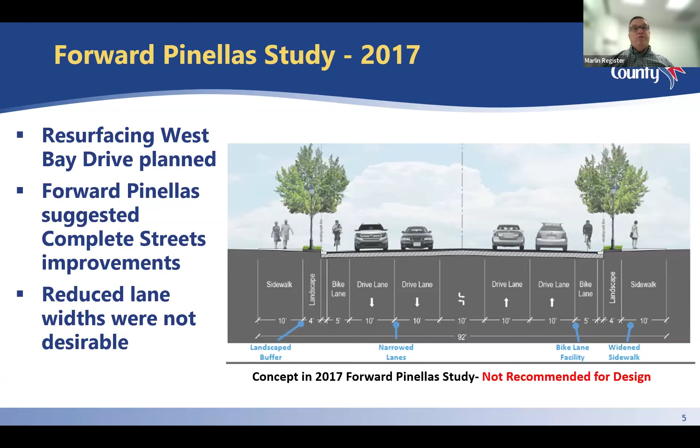In 2019, Pinellas County conducted a second study to evaluate other alternatives. Based on stakeholder outreach from city and agency partners, the county recommended a new concept that did not reduce the lane widths. The proposed concept included milling and resurfacing and restriping the pavement, adding landscape medians and pedestrian crosswalks, and constructing a 10-foot wide sidewalk on the south side of the roadway. This concept was advanced to the design phase.

Now let's look at the design for the proposed changes to West Bay Drive.

The goals of this project are to improve the roadway surface, increase driver, pedestrian, and bicycle safety, and improve pedestrian connectivity. These goals will be accomplished by resurfacing and restriping the roadway, constructing a new 10-foot sidewalk on the south side of the project area, and adding pedestrian crosswalks with flashing beacons at landscape medians. These improvements will better connect West Bay Drive neighborhoods, the Largo Medical Arts District, the Belleair Beach Causeway Bridge, beach communities, and the Pinellas Trail.

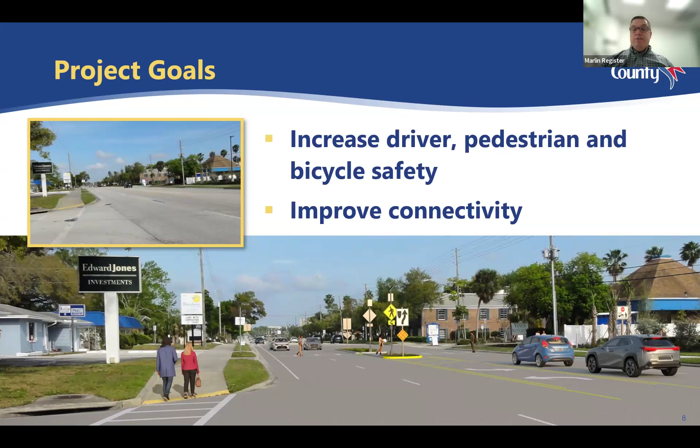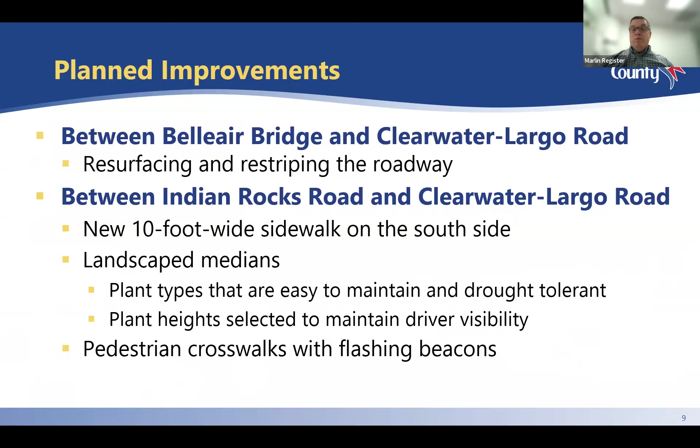Resurfacing and restriping is proposed within the entire project corridor between the Belleair Bridge and Clearwater Largo Road. From Indian Rocks Road to Clearwater Largo Road, a new 10-foot wide sidewalk will be constructed on the south side of the project area. 6 landscape medians will also be constructed, 2 of which will include pedestrian crosswalks with flashing beacons. Plants selected for landscape medians will be easy to maintain and will not interfere with driver visibility. Vehicle lane widths will remain unchanged throughout the project limits.

Planned improvements between the Belleair Bridge and Sunset Boulevard include milling and resurfacing only. This existing segment of West Bay Drive includes one 12-foot travel lane and 4-foot bike lane in each direction, separated by a center 2-way left turn lane with 5-foot sidewalks on both sides of the roadway. No changes are proposed.

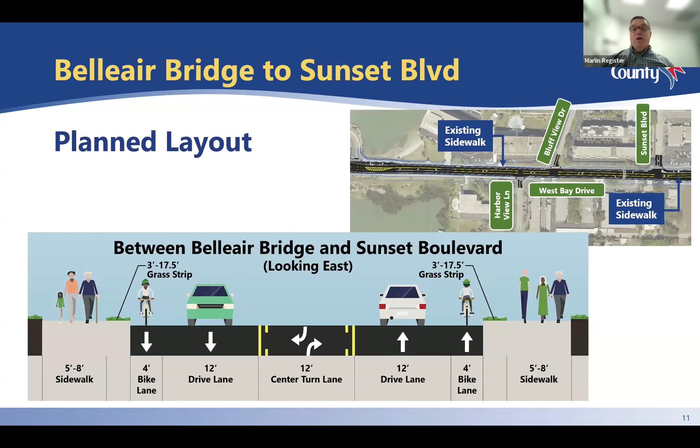Planned improvements between Sunset Boulevard and Indian Rocks Road include milling and resurfacing only. This existing segment of West Bay Drive includes 2 travel lanes in each direction, separated by a center 2-way left turn lane with 8-foot sidewalks on both sides of the roadway. No changes are proposed.

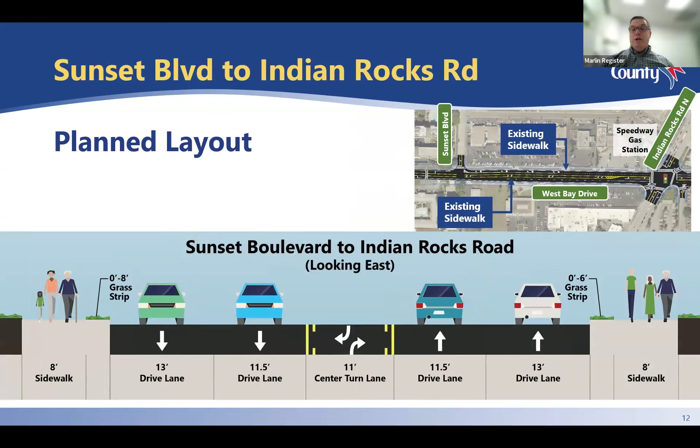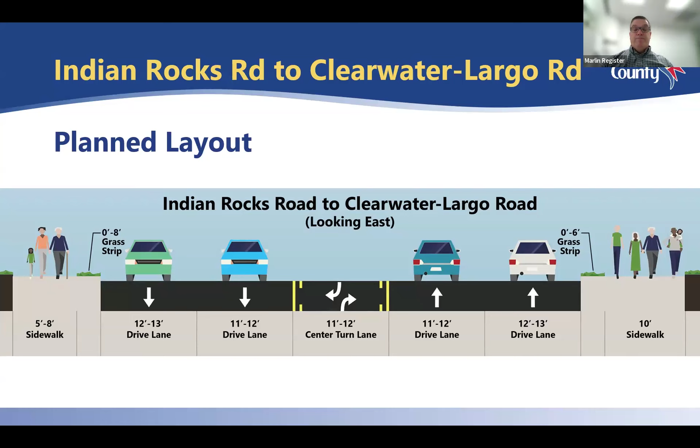Between Indian Rocks Road and Larchwood Boulevard, in addition to resurfacing and restriping, 3 landscape medians will be added. One of these medians, closest to Larchwood Boulevard, will include a pedestrian crosswalk. A new 10-foot wide sidewalk will be constructed on the south side of the roadway. Access to driveways in this section of the roadway will be maintained.

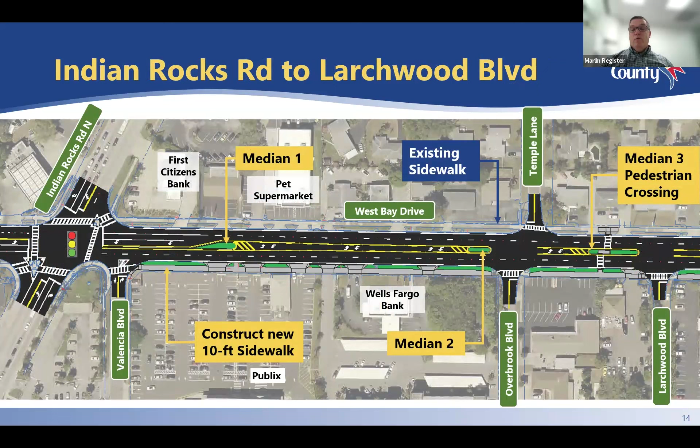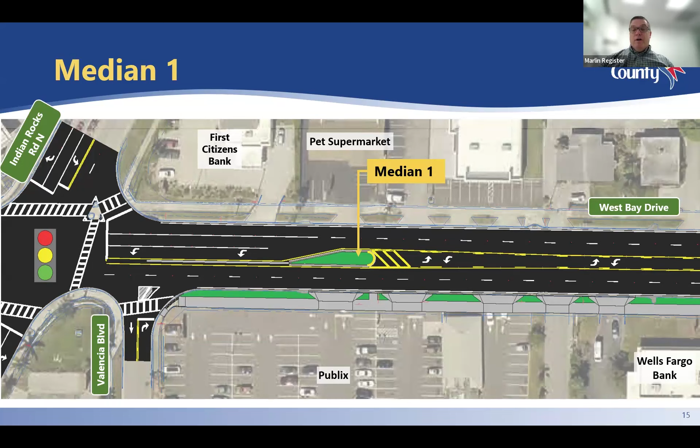Median 1 is a landscape median east of Indian Rocks Road and Valencia Boulevard that is part of a left turn lane from westbound West Bay Drive to southbound Indian Rocks Road. The median will extend across 2 driveways on the north side of West Bay Drive and the most western of 3 driveways to the Publix shopping center on the south side. Access from these driveways will not be impacted as left turns are currently prohibited. The traffic divider at the intersection will be shortened to allow left turn access to Valencia Boulevard.

Median 2 is a smaller landscape median just west of Overbrook Boulevard. No driveway or side street access will be impacted.

Median 3 is a landscape median with a pedestrian crossing between Temple Lane and Larchwood Boulevard. Left turns will be impacted for 2 driveways on the north and 1 driveway on the south at median 3. However, the left turn access for these movements will be accommodated from Temple Lane and Larchwood Boulevard. Left turns from the side streets will not be changed.

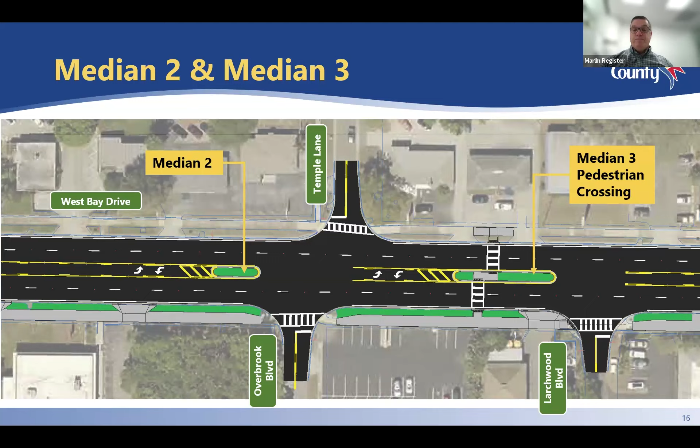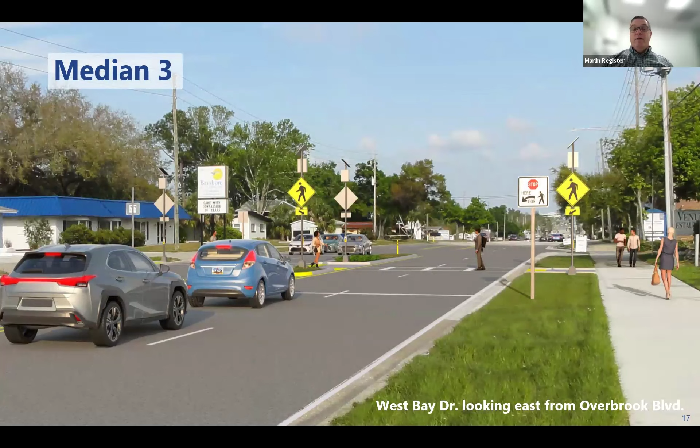Here is a rendering showing how median 3 will look after construction from West Bay Drive facing east. The pedestrian crosswalk and median are similar in design to the existing crossing on West Bay Drive near the Pinellas Trail. The crosswalk will include rectangular rapid flashing beacons that can be activated by pedestrians who want to cross West Bay Drive. The median will include landscaping and the crossing will be ADA accessible.

Between Larchwood Boulevard and East Overbrook Drive, one landscape median will be constructed between West Overbrook Street and Kilgore Drive. A new 10-foot wide sidewalk will be constructed on the south side of the roadway. Access to driveways in this section of the roadway will be maintained.

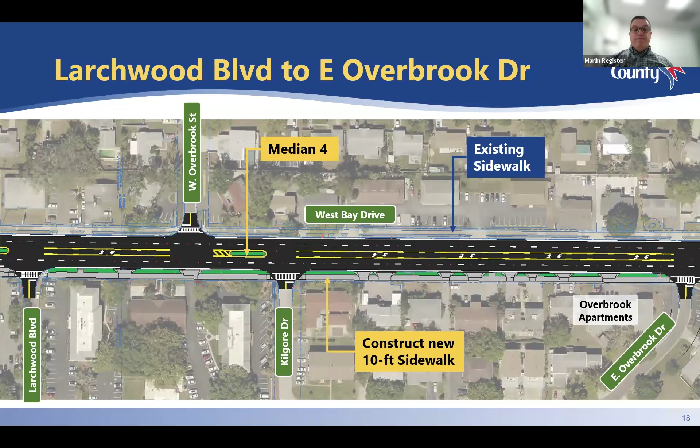Median 4 is a landscape median just east of West Overbrook Street. No driveway or side street access will be impacted.

Between East Overbrook Drive and Velma Drive West, one landscape median will be constructed between Tropic Boulevard West and Tropic Boulevard East. A new 10-foot wide sidewalk will be constructed on the south side of the roadway. Access to driveways in this section will be maintained, however the median does restrict left turn access between Tropic Boulevard East and Tropic Boulevard West.

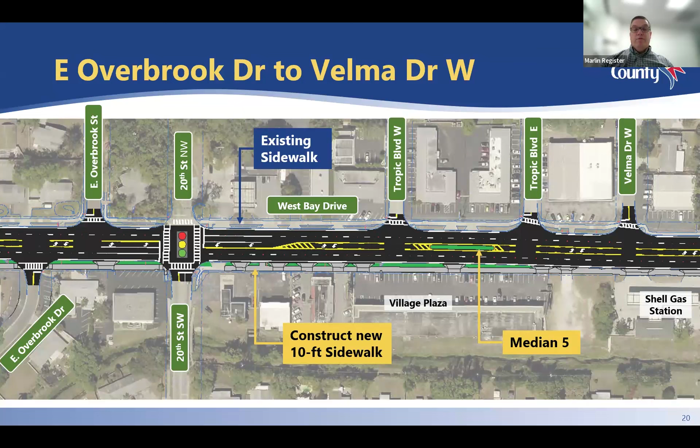Median 5 is a landscape median between Tropic Boulevard West and Tropic Boulevard East. Left turns at the two driveways to shopping centers on the north side will be impacted, however these movements can be accommodated on Tropic Boulevard East and West. Left turns will also be restricted for the middle of the three driveways from the Village Plaza Shopping Center on the south side. No side street access will be impacted.

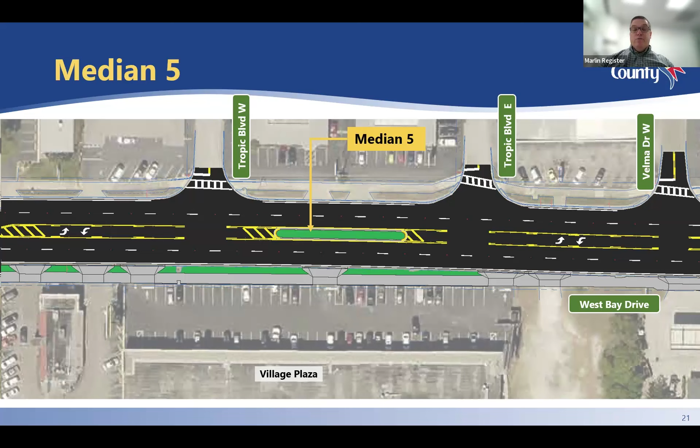A landscape median will be constructed between Velma Drive West and 15th Street Northwest. The median will include a pedestrian crossing. A new 10-foot wide sidewalk will be constructed on the south side of the roadway. Access to driveways in this section will be maintained.

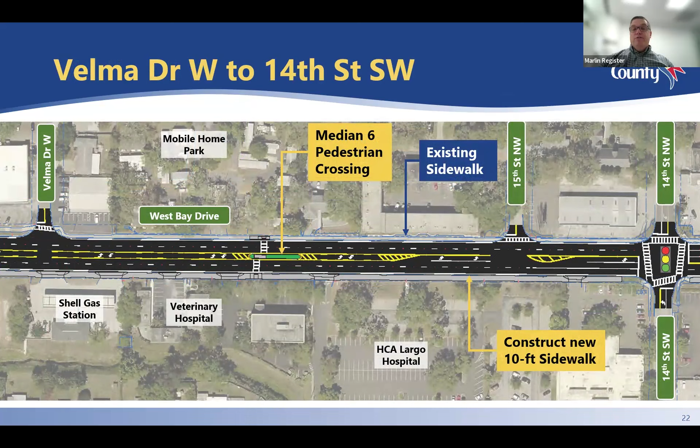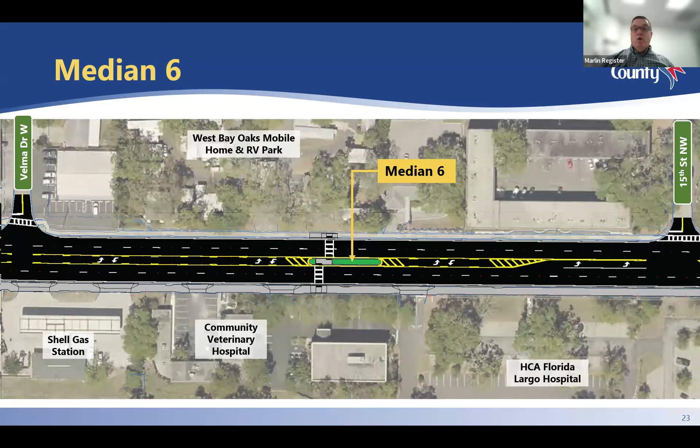Median 6 is a landscape median with a pedestrian crossing between Velma Drive West and 15th Street Northwest. Left turns from West Bay Drive to one driveway on the north and one driveway on the south will be restricted. No other driveways or side street access will be changed.

This is a rendering of median 6, also facing east on West Bay Drive. The design of the median and pedestrian crossing also includes rectangular rapid flashing beacons, landscaping, and will be ADA accessible.

No additional medians or pedestrian crosswalks will be added to this segment between 14th Street Southwest and Clearwater Largo Road.

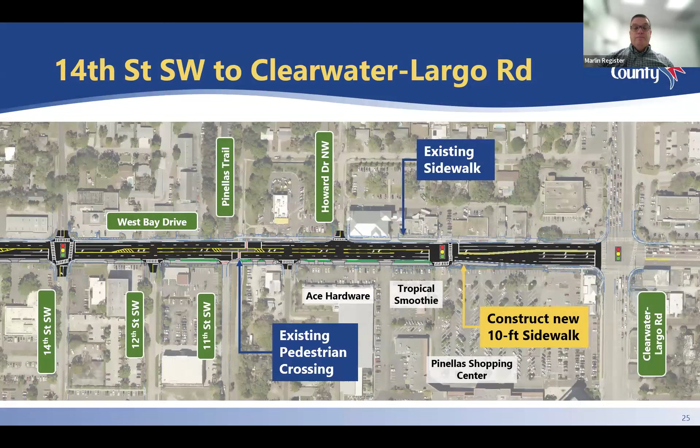After today's meeting, this presentation will be posted on the website at the address provided in the notification postcard sent prior to the meeting, and additionally shown at the end of this presentation. The project design is about 70% complete at this point. The feedback you provide will be used to help the team complete the design over the upcoming months in 2024. We expect to begin construction in mid-2025 and finish in early 2027.

During the 18-month-long construction process, access to businesses and neighborhoods along West Bay Drive will be maintained. Much of the construction work will occur during the day, but milling and resurfacing will likely occur during nighttime hours. Motorists should expect some travel delays in the form of lane closures, lane shifts, and minor detours. Prior to work that affects driveways, the county or contractor will coordinate with all affected property owners. The project website will be updated during construction to keep the community informed about lane closures, changes in traffic patterns, and other important project information.

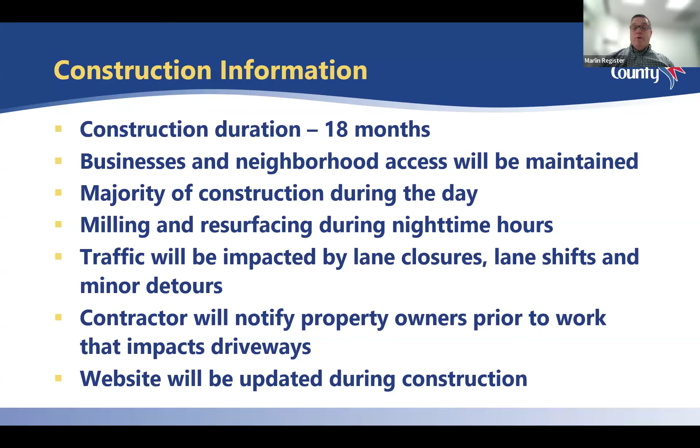We appreciate everyone hanging on with us through today's presentation. This was a lot of information to cover, but we thought it was important to be as transparent as possible. To recap, we've explained the planning and design work completed to date, the purpose of the project, and what decisions were made in the past that resulted in the design we presented today. We shared the design plans, including changes to the roadway, median improvements, sidewalk and pedestrian crossing upgrades. We also reviewed the next steps, including the upcoming construction plan to begin early next year.

Now I'll turn it back over to Tony and we can begin taking questions or comments.

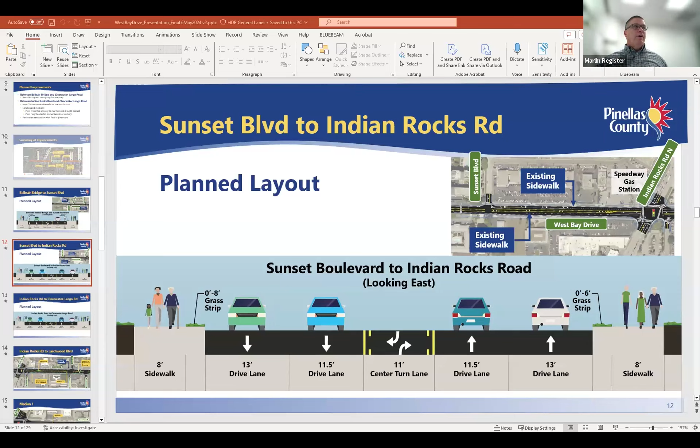Okay, thank you. Robert, if that didn't answer your question, please add another one further down. The next question is from Ann. Will construction from Indian Rocks Road be completed across all lanes and the new 10-foot sidewalk, or will one side of the road be rebuilt before moving on to the other lanes and sidewalk? Ann, I will attempt to answer this.

I may need some help from Marlin, but basically we will be resurfacing the road. We won't be reconstructing it. So there will be resurfacing work on one side at a time, and the sidewalk construction would most likely be a separate effort during that construction period. However, Marlin, can you add anything to that?

Yeah, we anticipate that the sidewalk work will be done first. We will also be looking to put the pedestrian crossings and the median in as soon as possible to assist with maintenance of pedestrian traffic during construction. We anticipate that the actual milling, resurfacing, and restriping of the road will be one of the last activities, as that's usually a cleanup activity towards the end to configure everything to the final configuration and get the final striping out there. Since this will be a linear project, we anticipate the contractor will work to contain this within certain areas as it progresses so we can maintain pedestrian access and detours during construction.

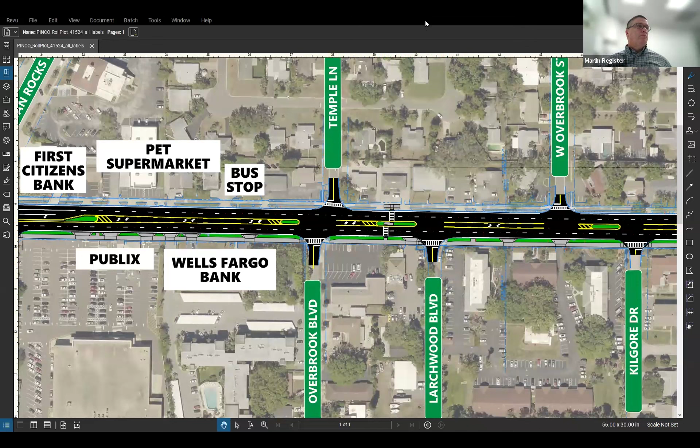Next question: I believe you stated that one purpose of the project was to connect West Bay to the Pinellas Trail, and yet the project does not provide for bicycle trails throughout. How could the project meet this important initiative? This is a very good question. Unfortunately, in order to include bike lanes in this project, the travel lanes themselves would have had to be reduced. During earlier meetings with the earlier studies, it was indicated by the local government and the community that reducing the lanes was not a good idea, so unfortunately we could not add bicycle lanes. However, the 10-foot sidewalk will help connect pedestrians and bicyclists to the trail, and there's a trail connection underneath the trail right there at West Bay by the McDonald's. So even though you're widening on the south side, you could ride on the south side and then get on either the north or the south side.

Next question: the traffic is very bad on the weekends and high tourist season. Is there a plan to make lane closures coincide with lower traffic times? We certainly would make every attempt to do that, however I will let Marlin address that in more detail. Yes, we anticipate that the milling and resurfacing work will be done at night, as previously stated in one of the answers to the other questions. That's typically what we're seeing in the traffic volume data available for this roadway - those traffic volumes are lower during that period, and it makes for a better work environment to perform that work at night.

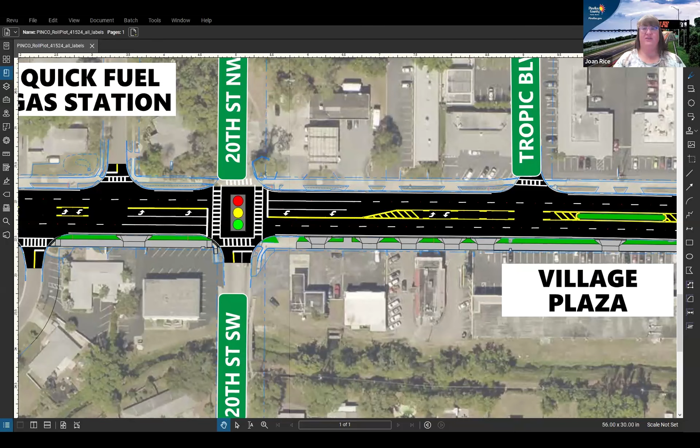Okay, then we'll go back to Ann, talking about the medians. Was there any consideration of the impact that the medians would have on businesses where left turns will now be restricted? Ann, you might need some help from Barry.

Yes, we do want to assure you this concern was very obvious for all of us, and it was something we considered as we developed the median locations. They were revised more than once based on input from property owners. City staff, including Barry Westmark, the city engineer, actually went out and personally met with most or all of the property owners that would be impacted, and we also talked to some of the business tenants as well. I will let Barry expand on that and explain his coordination.

Thank you, Ann. Yes, to the extent we could, we visited all businesses, especially those that would be impacted, and we made a significant outreach. There is a consideration, some trade-off there with respect to medians. Part of our research had to do with what is the impact of medians on businesses, and I'm happy to share that information. The result is that medians are not a factor that affects the viability of businesses, and in many cases it improves the business, improves commerce, and definitely improves property values. Thank you, Barry.